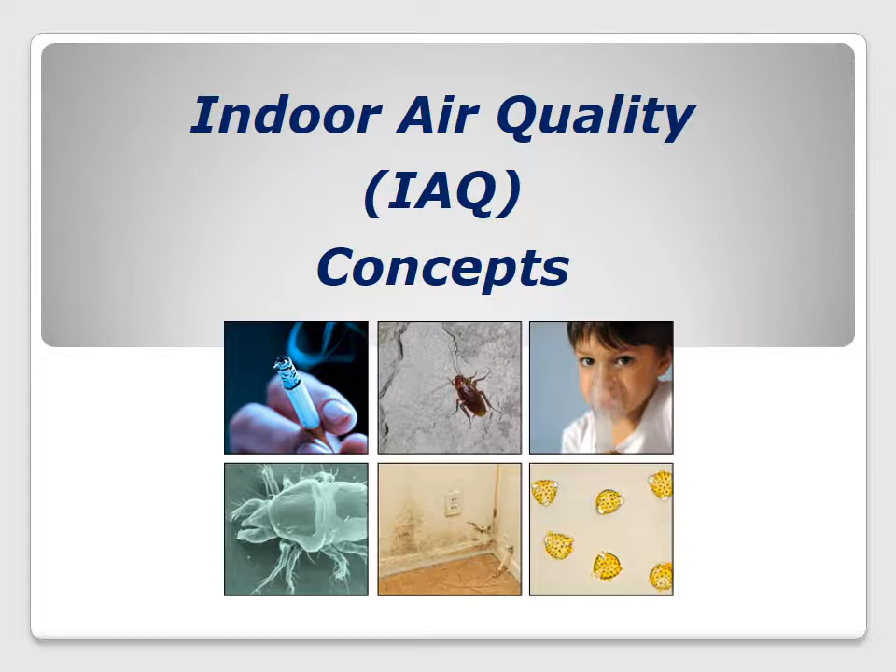The reason many energy efficiency and green building programs have adopted ASHRAE Standard 62 is to address occupant health concerns related to air quality. In the last lesson, I quoted the stated purpose of ASHRAE Standard 62.2-2013. This standard defines the role of and minimum requirements for mechanical and natural ventilation systems and the building envelope intended to provide acceptable indoor air quality in low-rise residential buildings.

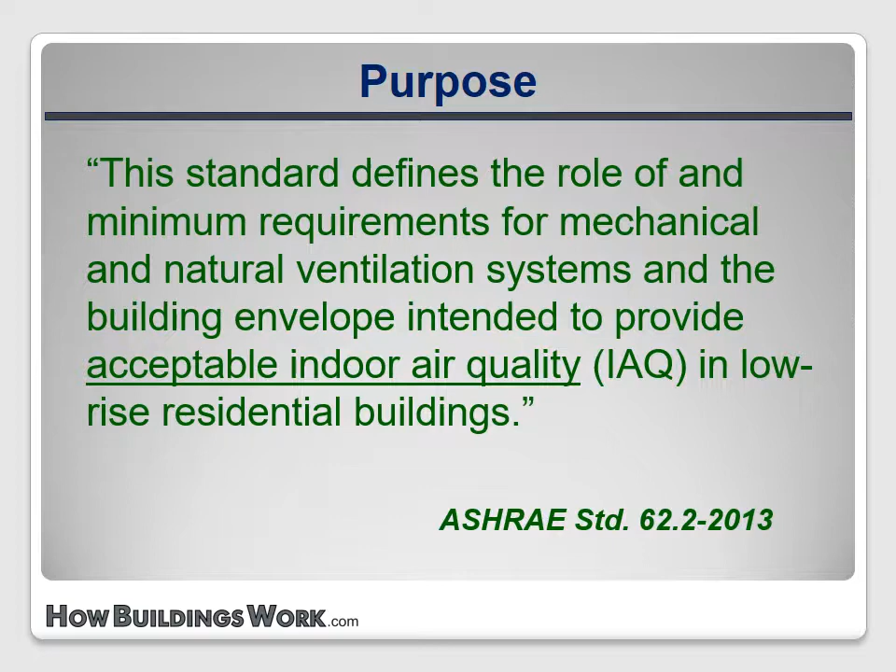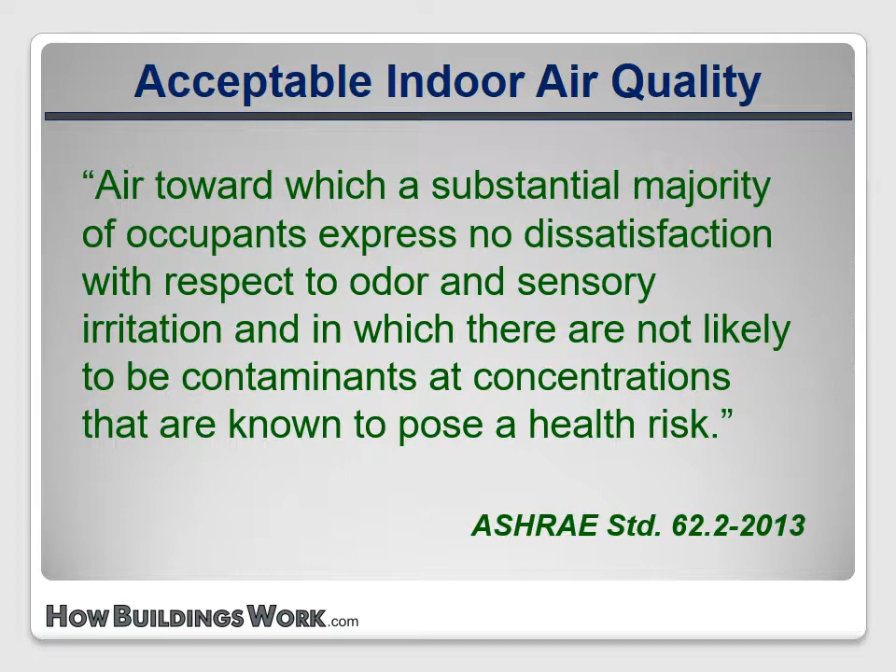That's an interesting phrase in there. Acceptable indoor air quality. What does that mean? Well, the standard defines it for us. It says acceptable indoor air quality is air toward which a substantial majority of occupants express no dissatisfaction with respect to odor and sensory irritation, and in which there are not likely to be contaminants at concentrations that are known to pose a health risk. That seems fair enough. But what causes dissatisfaction or irritation, and what are the contaminants that are known to cause a health risk?

Indoor air is generally less healthy and more objectionable to the occupants than outdoor air. That's because we add contaminants to it. We add moisture by cooking, bathing, and cleaning, and maybe from roof leaks and groundwater, and we even exhale and perspire moisture into the air. We add household chemicals from cleaning, hobbies, and even off-gassing from furniture. We add dust and other particles like pet dander, and sometimes we add tobacco smoke or combustion byproducts from poorly vented or unvented appliances or from candles burning in the house. These are the things that cause dissatisfaction, irritation, and health risks.

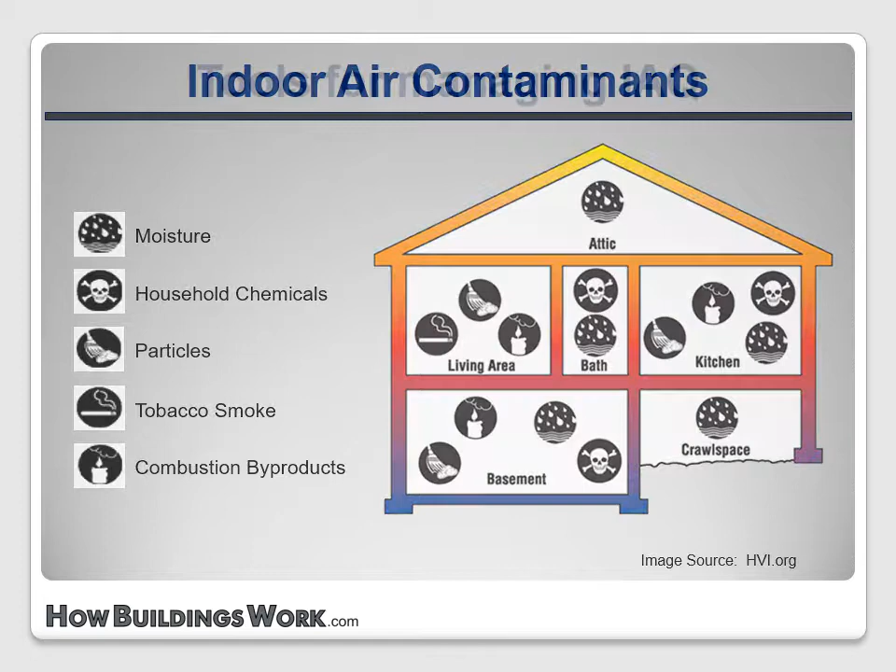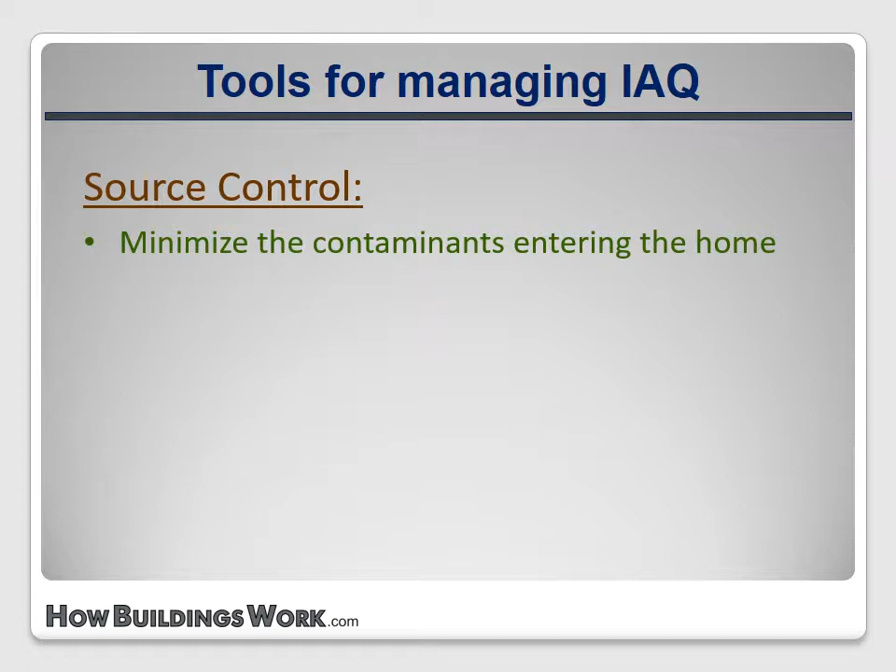So how do we keep the level of these contaminants low enough that they're not objectionable or unhealthy? Basically, it comes down to some simple concepts. First, we try to minimize the amount of them that get into the air in the first place. We call that source control. Then, if they do get into the air, we remove some of that air from the house and replace it with fresh outdoor air. We call that ventilation. And finally, we can attempt to remove particulate from the air. We call that air purification or filtration.

ASHRAE 62.2 doesn't discuss source control very much. You can find that information in other places. It does discuss air filtration, and I'll review that in one of the lessons. But the primary focus of the standard is on ventilation. Most of the text covers ventilation rates, devices, and methods.

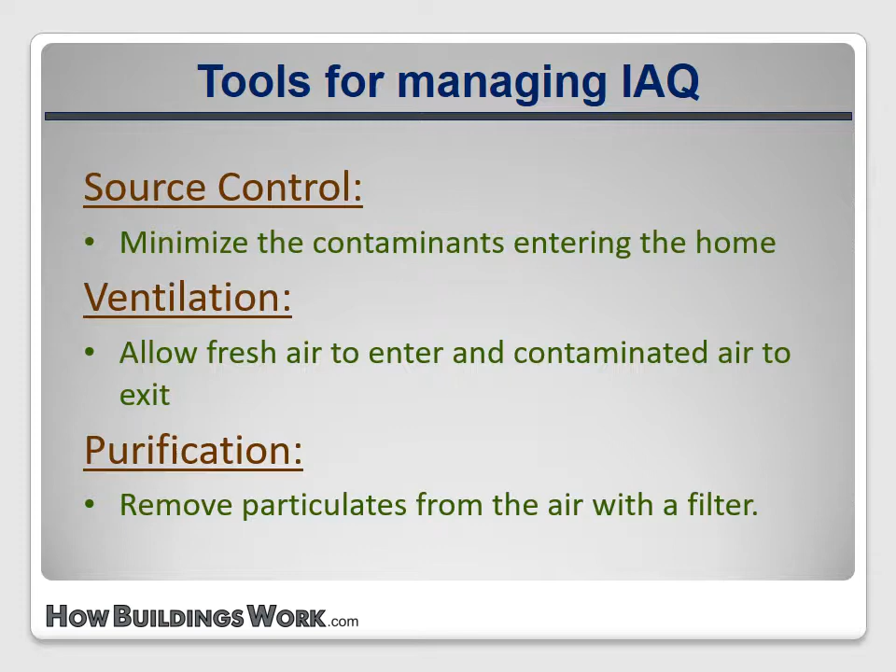When houses were built a century or more ago, the quality of the air depended on natural air leakage. Houses weren't sealed very tightly, and leakage carried stale, contaminated air out and fresh air in. But as time has progressed, we've built houses tighter for improved comfort and energy efficiency, and we've begun to add fans to provide additional air exchange. We can divide these fans into two categories.

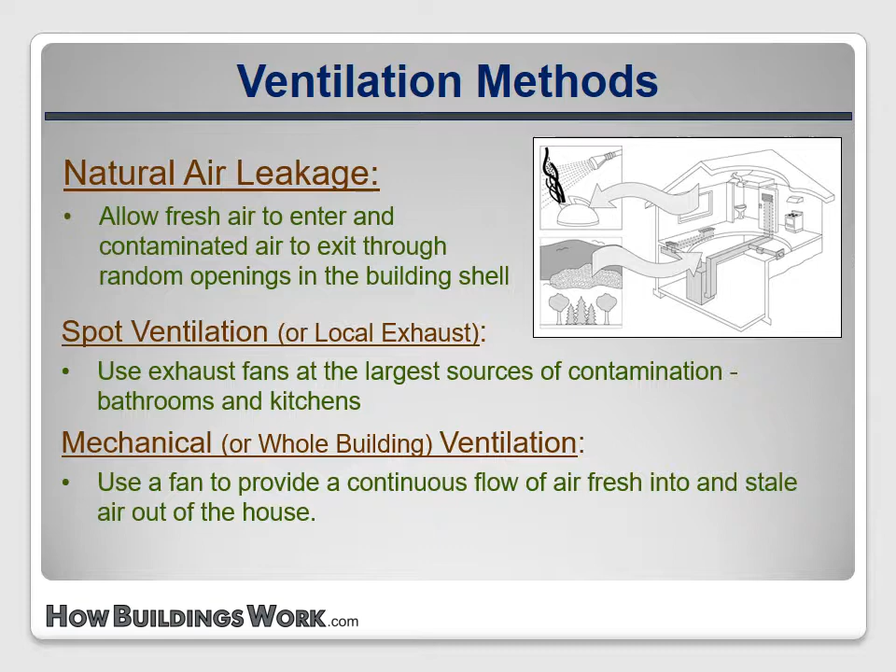Spot ventilation, which is called local exhaust in the standard, means exhaust fans that are located at the largest sources of contamination. This is usually bathrooms and kitchens. These fans run intermittently, only when the contaminants are being generated, and this is very common in houses today. Mechanical ventilation, which is called whole building ventilation in the standard, is less common. It means fans that run continuously, usually at a low flow rate, to provide air exchange for the entire house.

Each of these types of ventilation has advantages and disadvantages. Natural leakage is always present, and it doesn't require any occupant action to make it occur, but it varies with weather conditions, so there are times of the year when it provides little air exchange. The occupants have no ability to control the rate or timing to suit their needs, and they can't control where the air comes from. It might be coming up through a damp crawl space.

Local exhaust does very well at targeting big sources of contaminants, but it only runs when the occupants turn it on. If they don't use it regularly, it's not very effective. Mechanical whole building ventilation provides constant year-round exchange, and it gives the occupant some control over the flow rate. But that's only if the occupants understand and use the system properly. In addition, mechanical devices are prone to failure and don't always get repaired promptly or correctly.

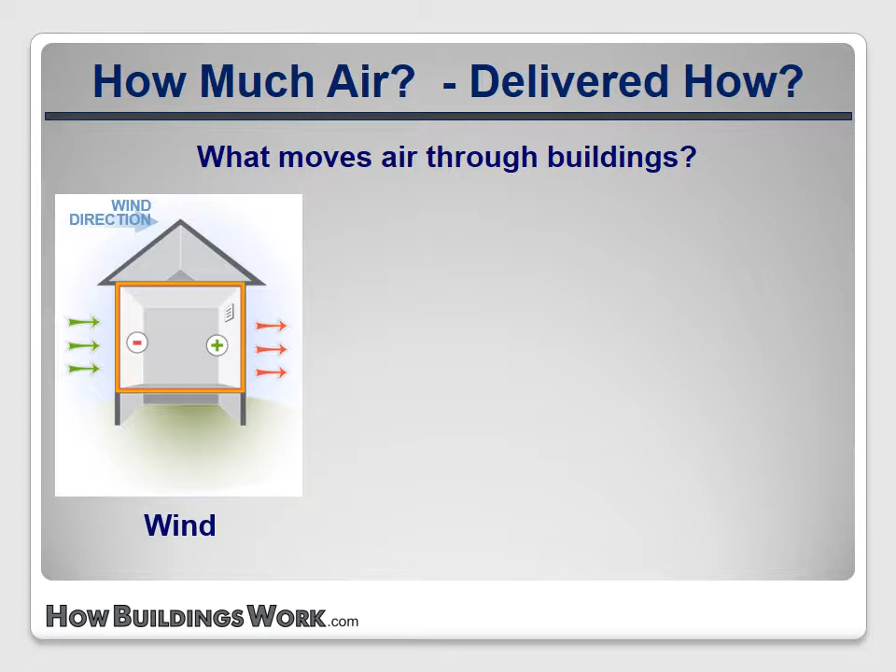To appreciate why mechanical ventilation is important, it's helpful to understand the different forces that push and pull air through houses. An obvious one is wind. Wind is moving air, so of course it will find its way in through leaks. Another is the buoyancy of warm air. Warm air is light, so it rises. When it's warm inside and cold outside, the house acts like a big chimney, with the warm air rising out of holes at the top.

And another is mechanical fans, which can push air out or pull it into a house. Mechanical fans are the most controllable of the three, and we can use them to ensure adequate airflow. Let's take a closer look at the other two to understand why they aren't as reliable.

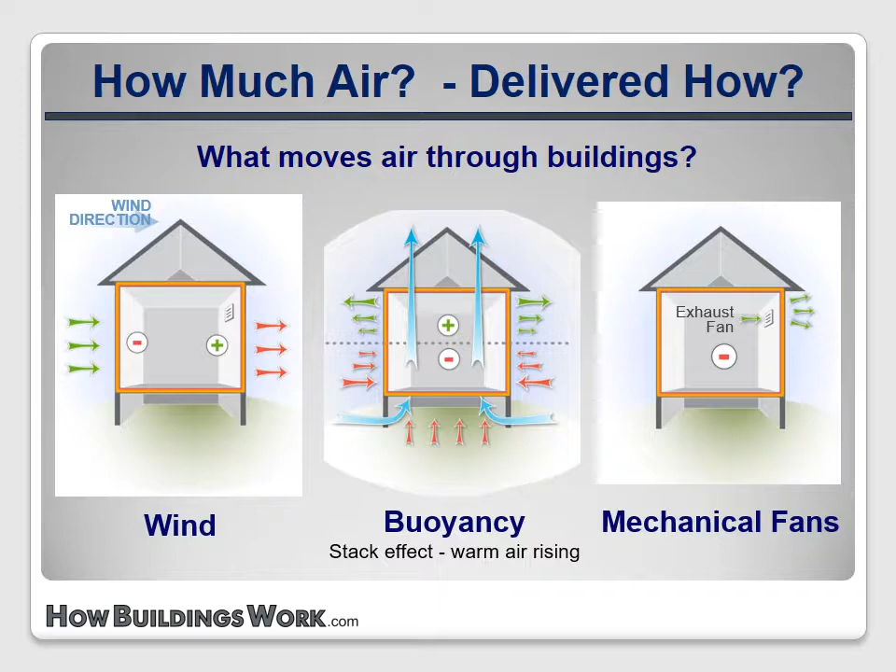When it's windy outside, that wind creates pressures around the house. It's fairly obvious that on the side the wind is coming from, the pressure pushes air into the house. But on the other side, where the wind wraps around, it creates suction that pulls air out. Somewhere in the middle of the house is a vertical neutral pressure plane that divides the intake and outlet sides. The two forces work together to accelerate air leakage. But this doesn't happen all the time. It only happens when there's a significant wind outside.

The buoyancy of warm air is a more significant factor, especially in cold climates. The warm air rises and creates a positive pressure at the top and pushes out of any openings. This creates a suction at the bottom of the house that draws cooler air in through openings down low. Again, there's a neutral pressure plane that divides the two, but this time it's horizontal.

This stack effect also doesn't happen all the time. It's highest in the winter, when it results in the biggest energy penalty, but it doesn't happen much at all in the warmer months. So there are significant periods through the year when these natural leakage forces don't do much to ventilate the house.

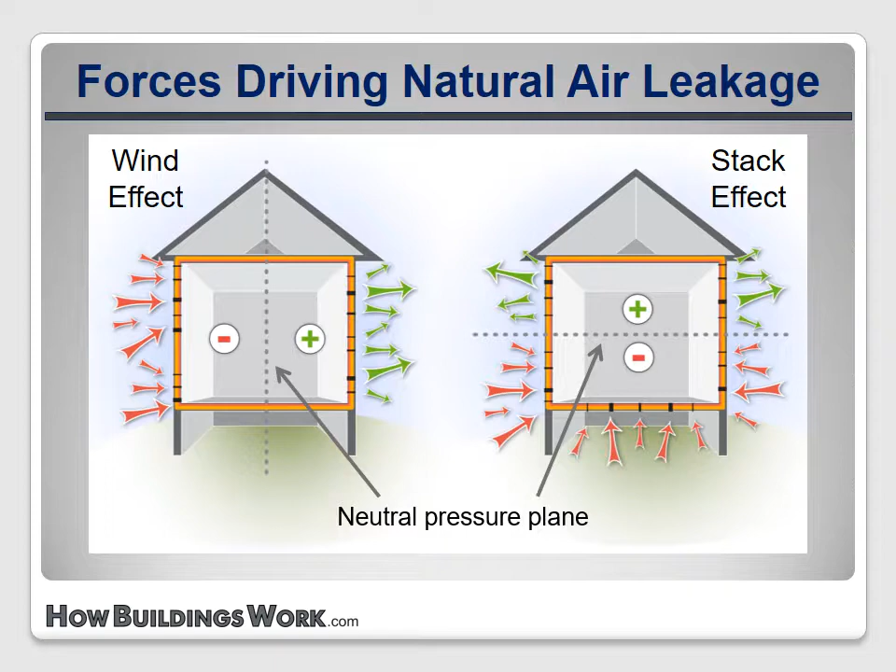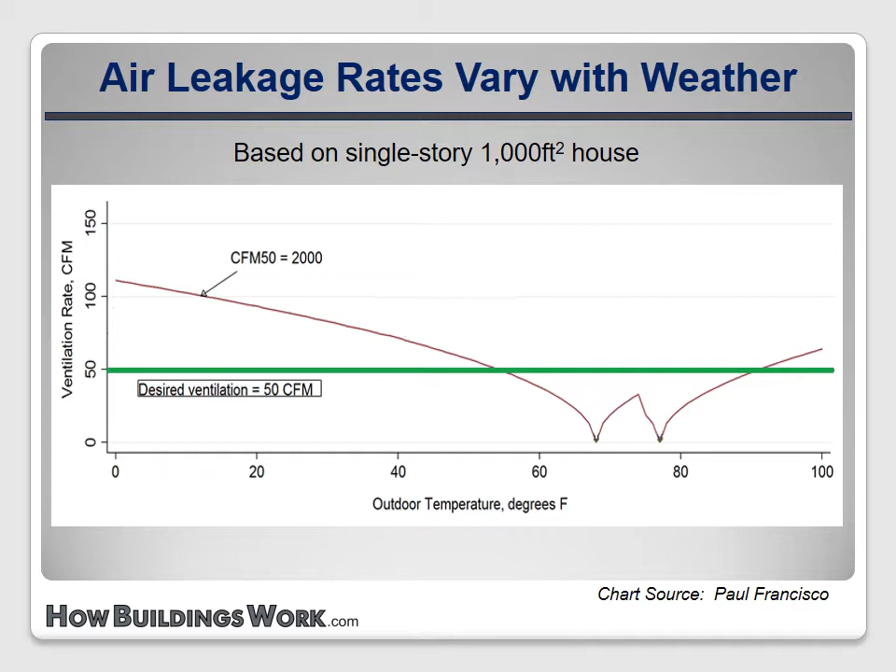Once the outdoor temperature is warm enough, occupants start opening windows, so there's a bit more air exchange, but it's still not enough to reach the desired rate. And when it gets really hot outside, there can be a reversal of the stack effect if the house is air conditioned, with cold air pushing out at the bottom. From this chart, you can see that the house rarely gets the right amount of ventilation. It's usually either too much or it's too little. That's why we try to seal it tight and ventilate it right using mechanical fans.

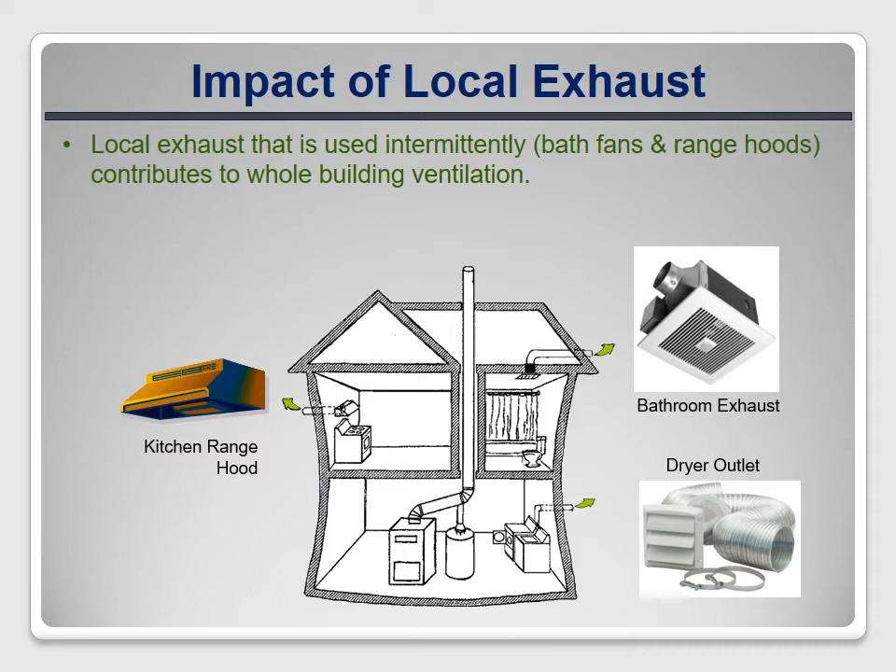And keep in mind that intermittent local exhaust also contributes to whole building ventilation. When these fans run, they increase the air exchange. So if they don't exist or they have low flow rates, the overall building ventilation suffers. Now you understand the basic concepts. In the next two lessons, you'll learn how to calculate target whole building ventilation rates using ASHRAE Standard 62.2.